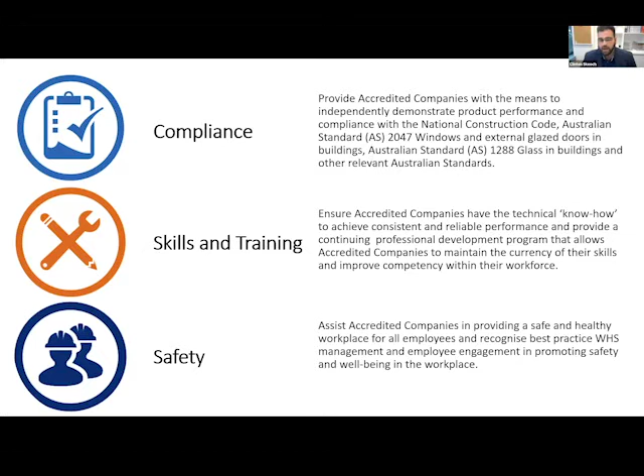To give you an example, the checklist or the assessment is not overly concerning. Many people hear the idea of an audit and get daunted or overwhelmed by what that may be, thinking the tax man's about to turn up.

There's a team here to help you through that process and talk you through any questions you may have to facilitate this. Together, I think if we're able to demonstrate that as an industry, we're able to show that we not only have robust standards, but that each and every member is able to demonstrate compliance. It's a very powerful thing for us to move forward together.

At the end of it, once you've completed that process, the association will issue you with a compliance certificate—so an accredited compliance certificate, safety pillar, or skills and training program.

Sorry, I thought there were some questions for me, but they seem to be technical questions in relation to the audio.

We've got the safety accreditation and also the skills and training. It's our hope that those three pillars will work together in partnership with each other to demonstrate to your consumers, to your customers, that your company stands for something, that you're standing shoulder to shoulder with compliant, accredited companies and being able to demonstrate best practice in our field.

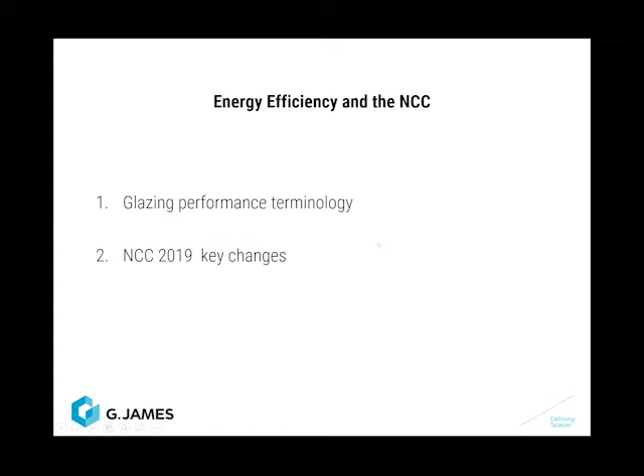We'll go through a couple of the key changes with regard to NCC 2019 for both Volume 1 and Volume 2. With regards to AFRC, or WERS data as it's more often termed, AFRC is referenced in both of the NCC versions through the guides and through the attachment notes.

There are a few things with window data that are important. First of all, they are done under specific sizes so that there's always an apples to apples comparison between two window products. So window A as a sliding window and window B as a sliding window are assessed under the same methodology and the same size. There are some quite strict rules in the background about how those values, with regards to U value and solar heat gain coefficient, are generated. They exist so that it doesn't matter who performs the assessment, the answer should be the same.

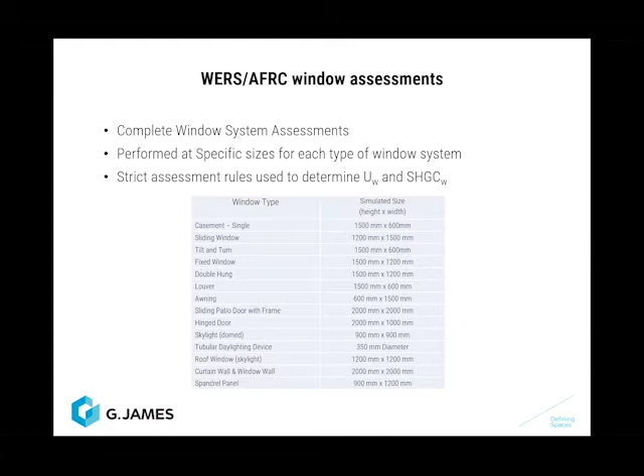With regard to solar heat gain coefficient, I don't know how many of you would have seen the SHGCw and U value, Uw terms. They are specific with regards to the whole of window, so they are essentially just the solar heat gain as an entire entity. One of the things I am going to touch on is thermal bridging, which is a bit of a buzzword at the moment, and it's one of the things the NCC has placed a lot of focus on, both with regard to Volume 1 and with regard to the changes coming through for 2022 in residential.

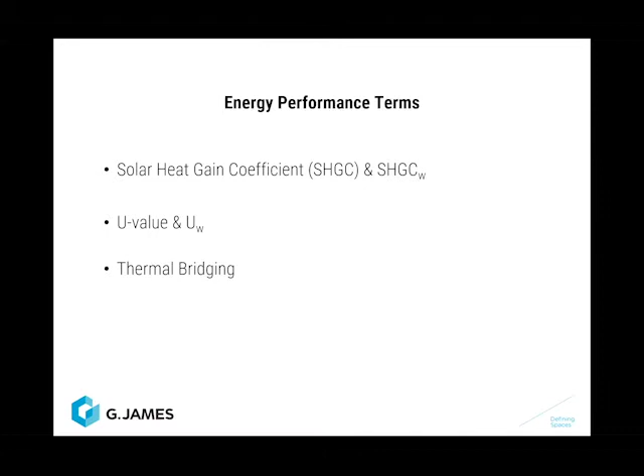Solar heat gain for a window system is an assessment of how much solar radiation is coming through that window. It includes both that which is directly transmitted and that which is re-radiated. It also includes the energy absorbed by the frame itself and re-radiated to the interior. There are some fairly aggressive environmental conditions both of these are done under. Solar heat gain is done with a warm external air temperature of 32 degrees and a typical air conditioning load on the internal at 24 degrees. Then there is a daylight amount that strikes that window, and it's calculated from those values.

U value with regard to window is a measure of the non-solar loss or gain through a window system. It's really analogous to R value, except it's essentially thermal conductance as opposed to an insulation value, so the two of them are usually a reciprocal of each other. There is no solar radiation in the calculation for U value. U value in Australia is calculated with regards to the NFRC or ASHRAE conditions, and they are extremely aggressive - calculated with a minus 18 degrees Celsius external temperature and a 21 degree internal control temperature, with a reasonable wind speed on the outside. As you can imagine, that is a very large driving force.

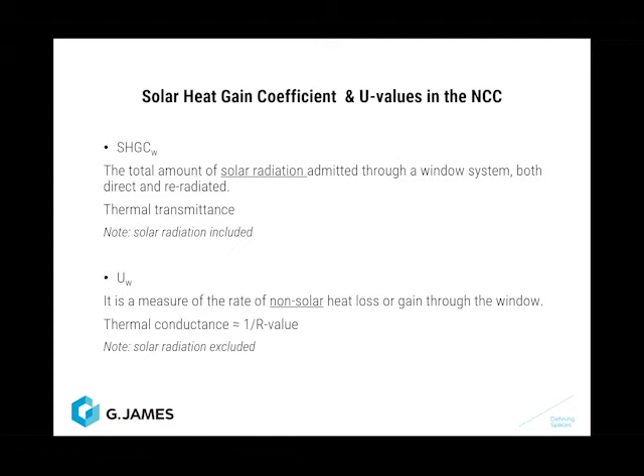Thermal bridging is probably going to be the most important part of what I touch on today. There is a formal requirement in NCC 2019 Volume 1 that thermal bridging must be included in glazing performance. Thermal bridging is a term analogous to a thermal short circuit. With regard to window systems, it means that all the elements involved in the fitment of it must be included - so if that includes subframing, angle glazing - if you are not taking into account the performance of those elements, you are not demonstrating compliance to NCC Volume 1, 2019 for any jobs that might have been done under those DAs.

With regard to NCC Volume 2, it is still business as usual, so the standard WERS values, most of which don't contain any subframing data or fitment elements which are variable, can be used and should be used. You might find with regard to multi-residential that there will be some requirement from some consultants to include the use of subframing. And as with all of those things, it's always up to the consultant what gets done.

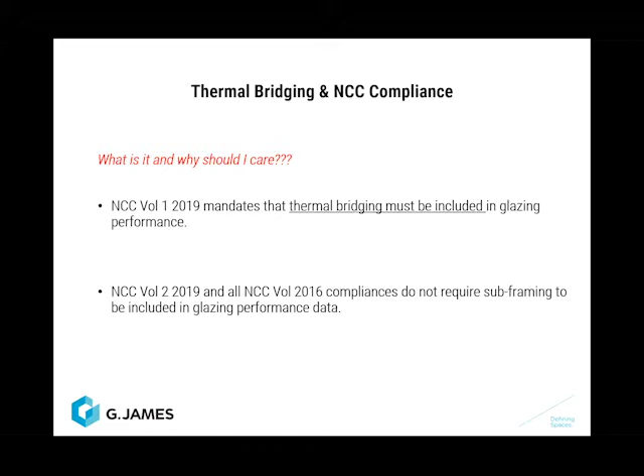So with regards to NCC as a whole, one of the things they tried to do is change the way in which it was being assessed. It's no longer glazing and climate specific design trying to generate the best outcome. What they have said is that the performance of the structure itself has to be optimised to lower its CO2 generation during its operation. There have been some new additions.

First and foremost, there has been a very large increase in the requirements, so the deemed to satisfy performance requirements have been made extremely strict. But they have also created alternate compliance routes: JV1, which is a NABERS assessment, JV2, which is a Green Star, both of which are as-built not as-occupied, and JV3 has been tightened up a great deal so that a lot of the loopholes that exist have been closed.

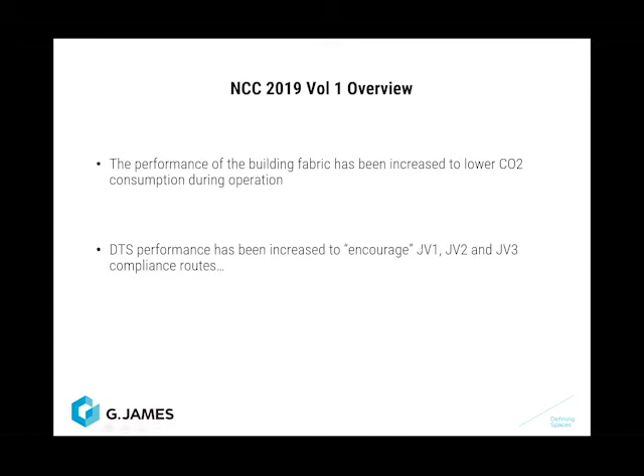For instance, one loophole that used to exist is that if you were using gas to generate power usage for a building versus standard electrical power, you could generate a different outcome. People would do the JV3 reference building using one of those energy forms, then change, and suddenly it didn't matter what they did, they had compliance. That's part of the real reason the drive towards CO2 consumption has been done, so those two energy forms and their CO2 contribution have been aligned correctly.

So this is just a summary page of what the major changes are. You'll notice that thermal bridging is at the top - this is obviously the one change for the glazing industry which should be addressed first and foremost. The new compliance methods are just Green Star and NABERS. For JV3, if you go through section J, the requirements are now extremely detailed.

There are occupation and occupied zone usages, times, heat loads being generated by individuals - all of those sorts of things have been very aggressively detailed, and that's to make sure a lot of the loopholes are being closed.

Significantly, with regards to the glazing industry, has been the creation of overnight operation buildings - that being class 3, hostels, boarding houses - and a lot of the medical and ward areas for medical buildings now have extremely stringent energy requirements.

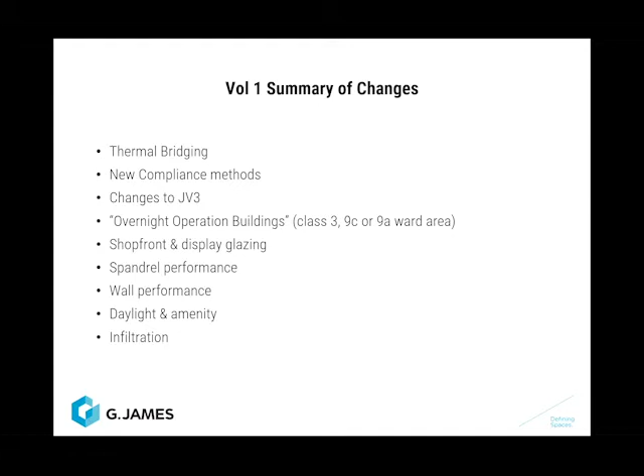Infiltration - this is a workmanship clause which has been placed into the code. What it's saying is that for the defined areas they have done, they are actually generating the quality of workmanship that a windows system should have. That's one to be aware of, and a testing methodology for compliance exists for that.

So as I went through, wall is now the term that determines the performance of the building envelope. It guarantees wall, glazing, spandrels, brickwork - it doesn't matter, they all have a requirement as a wall. For the glazing industry, that wall performance has actually been placed in as a U-value performance, which is quite advantageous because it means the methodologies that exist within WERS and within the AFRC can still be used to generate outcomes.

One of the terms you might see used is window-to-wall ratio, which is really just the percentage of glass that exists in an elevation or within a facade.

One of the things that wall doesn't include is vents and grills and non-glazed openings into the structure. It's just because mainly they don't know how to deal with it yet.

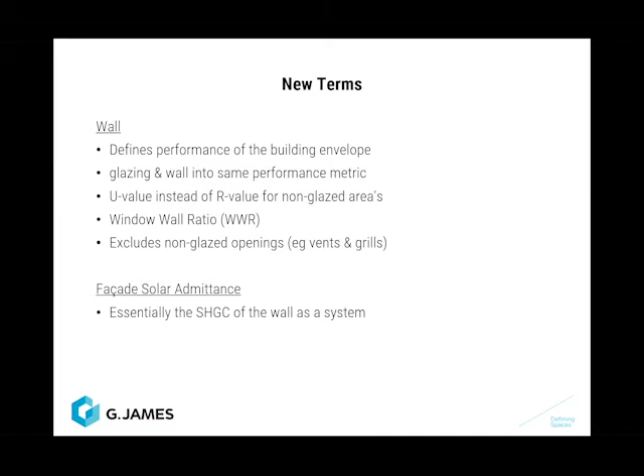The other term you will see written is facade solar admittance. This is merely a term describing the solar heat gain performance of the entire wall. It's analogous to the same, and because the solar heat gain of a non-transparent element is 0, you can always calculate the wall's performance by multiplying the glazing solar heat gain performance by the window wall ratio. So whether that's 0.6 or 0.7, you can calculate an outcome quite easily.

Changes to JV3 - this is both good for the industry and bad. One of the things they have done is reduce the ability to trade off facade performance for services. That doesn't mean you can't trade off the performance of the wall itself - you can take some of the wall performance from a western wall and put it on a northern wall if you want. But it means the overall building fabric is a lot harder to trade off, and that means the performance of glazing will improve.

When a JV3 is being done, they've said no longer is it acceptable for any calculation method to be used. You now have to use one that is compliant and certified against ASHRAE 140, which merely demonstrates the reliability and quality of a calculation engine.

There is a human comfort level that now exists as mandated within JV3. It is the same one that exists within Green Star and NABERS. So those three compliance routes have been aligned.

There are very large sections in JV3 that determine all the variables that must be included in the simulation and comparison against the reference building. This is really just to reduce the gaming that was going on, and it also means Green Star and NABERS align with JV3. So it doesn't matter which compliance method is used, the same outcome should be obtained.

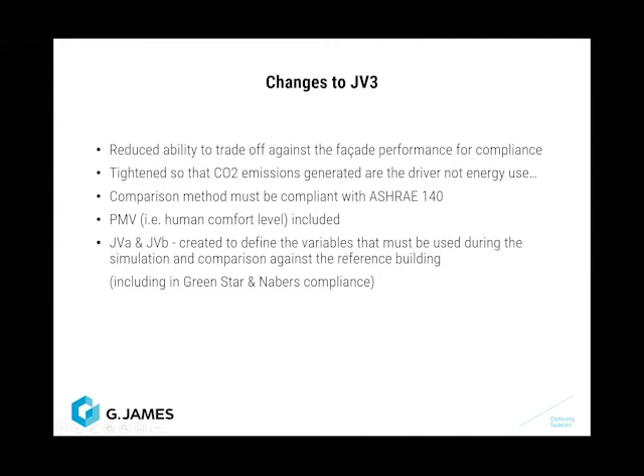So the DTS, or deemed-to-satisfy requirements, for most buildings or daytime operated buildings - you can see that the U value is required to be less than or equal to 2. That is quite stringent. It is not as generous as it has been previously.

And you will see the solar admittance factors, or the solar heat gain for the wall, are listed there. So obviously some of the warmer climates, you can see, are quite stringent.

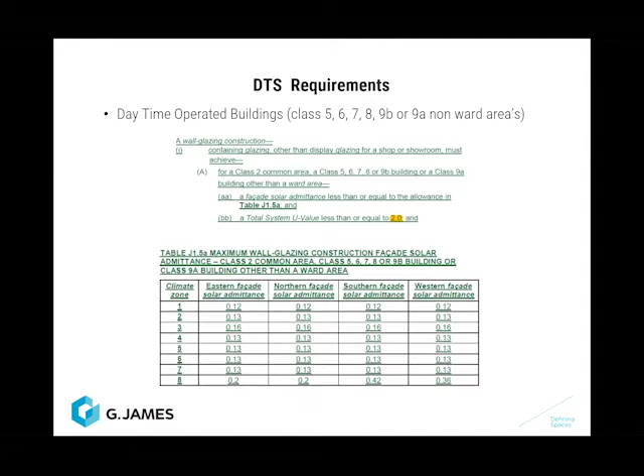I'll flick on to the next slide to give you an idea of what those numbers actually mean. So as you can see, for a solar admittance of 0.13, if you're using a high performance glazing system - and I've assumed in this case something like a tinted double stack low-E IGU - which is going to have a solar heat gain performance in the realms of low 0.2s. 0.23 is pretty average.

So you can see that really generates just under a 60% maximum performance of the wall before a Green Star, NABERS or JV3 compliance route would need to be done, which obviously allows a lot more trade-off. That's one of the things that underlies the code now - they're really trying to push people in those directions rather than having a simple deemed-to-satisfy.

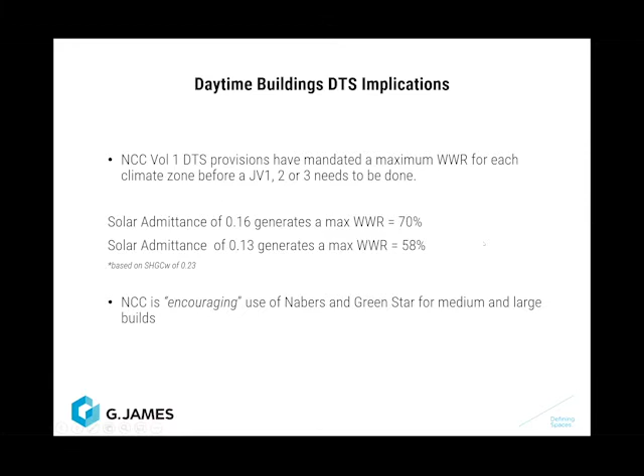Okay, overnight buildings. Now this is something which is important, and they are extremely stringent. There is no way of working around that. These values are extremely low.

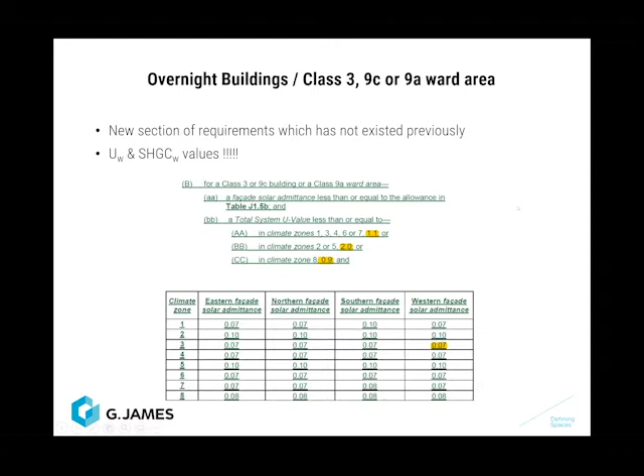The only building I'm aware of that meets the deemed-to-satisfy for a U value of 1.1 and that solar admittance is actually the Armidale-based hospital. To give you an idea, that has a window to wall ratio of about 11%, and uses some extreme performance materials. So really, I haven't seen any compliant jobs coming through yet for these types of buildings, but they will be extremely difficult to comply with. I suspect there might be some magic from the consultants in the background.

To put some of those numbers into perspective, I've once again assumed a high performance IGU. So based upon the solar heat gain requirements, you could have a 30% window to wall ratio, but based upon a standard - and I've used a floor to ceiling assumption here for what an aluminium glazed window system would be, which is a U value for the whole system of about 3 with that type of glass in it - you would be allowed to have only 3.6% glazing within the entire wall. So as you can understand, that is very difficult.

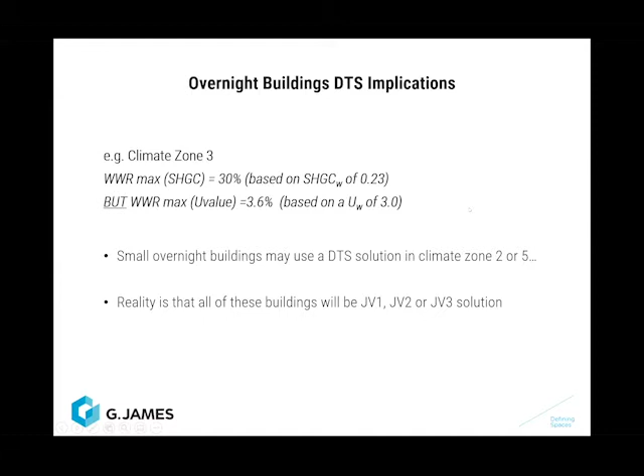So even a hyper performance, thermally broken system would still be less than 10%, or just on 10%, of what you could possibly do as a deemed-to-satisfy. Really, they're just forcing everyone's hand into having to do high-level analysis to move the design around to suit its climate, conditions and use. However, I do believe they are far too strict, and that one day there will be a large pushback against U-value in some of these climates and areas.

So I touched upon shop front and display glazing and its implications before. Basically it means a clear IGU and even a moderate standard aluminium frame system satisfies these installations, which is a great thing, because there's no longer installations like some of the car dealerships where they're having heavily tinted high performance glass products in, which was changing the appearance of the vehicles. I actually think this is one of the things the NCC did a great job of.

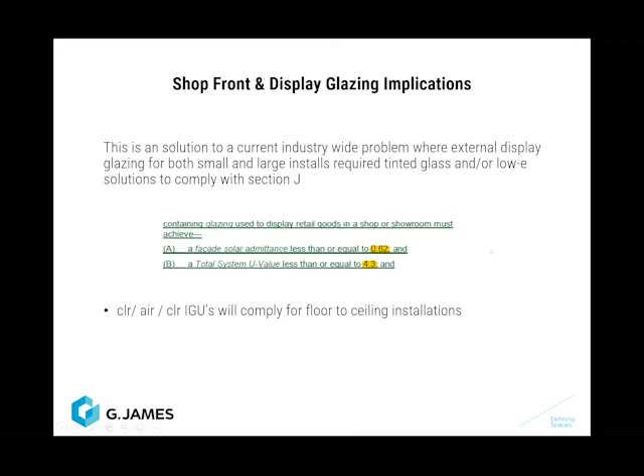These are treated in two forms in the NCC. There are deemed-to-satisfy types, with performances given for standard aluminium and thermally broken glazing systems. But the code allows you to do an AFRC or WERS simulation on those, and you will get a significantly better outcome, both for U-value, if you do the full simulation. The ability for those ratings to be done exists currently, and it's something I'm certainly making sure you're all aware of.

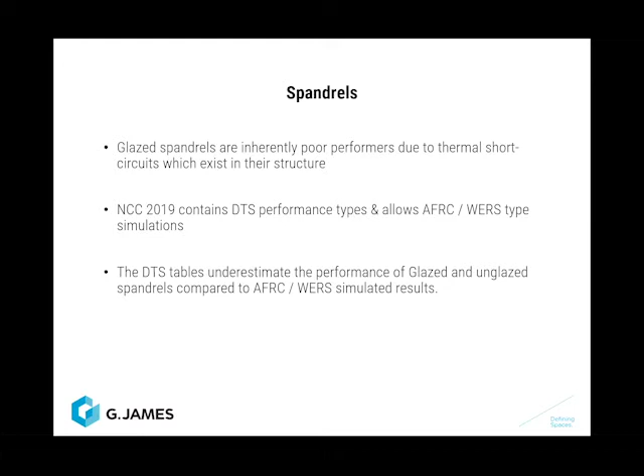Infiltration — we touched on this before. Essentially the ability exists for someone to go back and do a blower door assessment on an installed glazing system and show that it didn't meet its legislated requirements. That's something I think we all need to be aware of and mindful of, that it exists now. It's not overly stringent, but there is a workmanship clause for glass and glazing that exists.

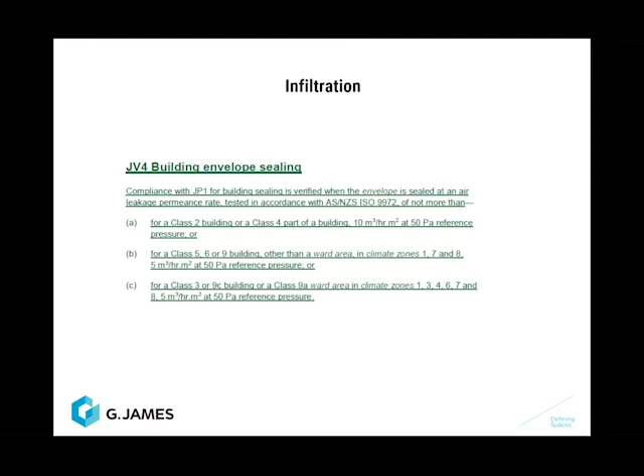Okay, so quickly we'll touch on Volume 2, which is the residential section of the code. Now, Volume 2 hasn't had a change in stringency, but it's definitely going to be harder to comply with. No doubt some of you might have started to see the changes in residential glass types and residential glass performances, which are starting to filter through.

The reason for that is what used to happen is if someone was doing a NatHERS assessment — Accurate, BERS, First Rate, any of those programs for compliance — if it was in a cooling market, they used to make sure the cooling performance of the structure met the requirements. What you have to do now is demonstrate compliance for both its heating and cooling performance. So in mixed climates in particular that will generate some differences in the glass, and much higher performing glass you will start to see being requested.

So the verification method for the reference building, which has been at times abused in certain markets — not in this market, but in some of the other states — it no longer allows NatHERS software programs to do the reference building comparison.

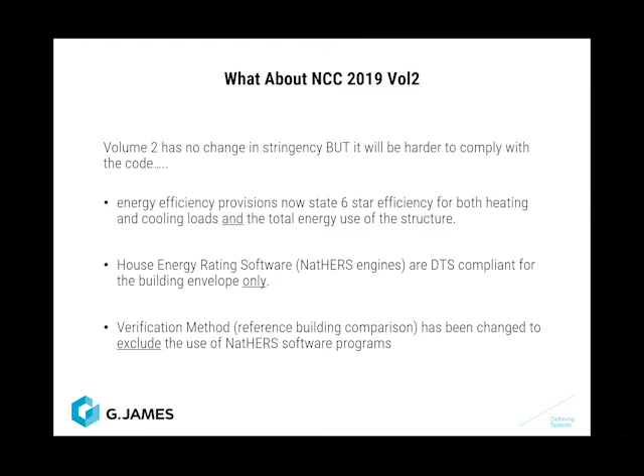Now, the reason for that is multi-level NatHERS programs always used to assume everything was a slab on ground for its analysis. So when it was an elevated level, the performance of the calculation engine wasn't optimized. That's something they're working on at the moment and will probably be fixed up in time for 22. But the outcome of that, which we'll all see for the next few years, is that glazing performance is going to increase — in hot markets, cold markets, and particularly mixed markets.

Okay, so with regards to the changes coming through, there are no changes expected for glazing until 2022. I think we're all aware that residential and multi-high-rise is going to have a sizable stringency change in 2022, and I believe there will be some other requirement changes as well starting to filter through. But I don't believe that is going to be in our worst interest — I believe better performance glazing is in everyone's best interest.

And that's all I have. Probably before I finish up, one of the things I will say for the NCC 2022 residential review is that I would expect everyone to see the influence of those changes being larger on glazing than we would have experienced previously. The reason for that is a lot of the low-hanging fruit, the easy things to improve in residential building design, have already been done. So I think this time around we will all see a larger increase.

Are there any questions? There was just one there, Michael, about what does PMV stand for?

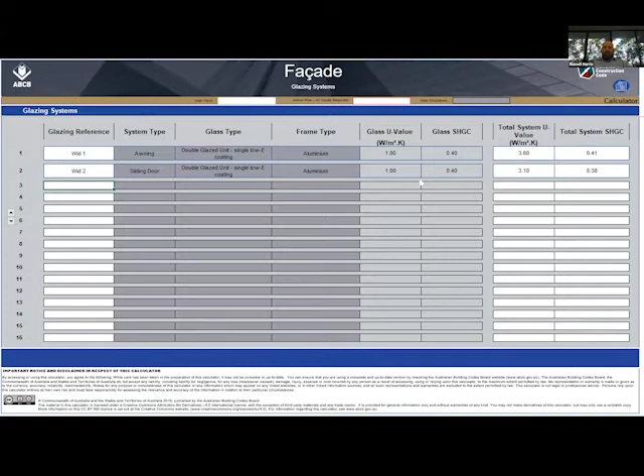This is what the glazing system looks like. It gives you the opportunity to enter in various attributes about the window or the glazing system, the whole of window U value and solar heat gain. Then you go on and put in the wall details, shown here. I won't go into this too much detail, I don't expect many people will be dabbling in this space too much, but it's possible depending on what your business model is and what sort of engagement you have with your supply partners. This is what it looks like in terms of entering in the wall data, and you get a green or a red result to tell you whether you're compliant or not. There's also elements of shading in here.

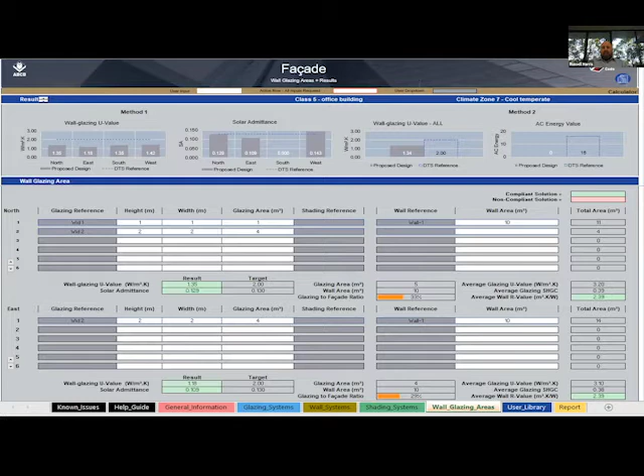The outcome is a report, which is effectively a pass or fail, not too different to the old glazing calculator. The main difference being that it takes into account the 3 elements of the wall U value, the glazing U value and solar heat gain, as well as the shading to calculate the solar admittance.

There's a really good publication from the ABCB on energy efficiency in volume 1. Allow some time to read it. It's a couple hundred pages and it's pretty hard going, but there are some really good worked examples in there. If you want to understand the science behind it, grab a calculator, a pen and paper, and you can do it yourself. It actually explains how these calculations are derived, so that's a valuable exercise if you really want to understand it. And this publication is available on the ABCB website for free.

I want to move on to the other changes in the NCC 2019, and they're fundamentally around acceptable construction practices. ACPs are effectively a DTS solution, so our recipe for compliance. I'll just flick through those.

Fundamentally, the most relevant part for us is window installation. The ABCB invested a lot of time into expanding the ACPs, particularly in volume 2, and we were engaged with the ACP working group under the ABCB committees. What we were fundamentally trying to address is this word 'adequately'.

This is the previous provision, from the 2016 construction code. There was one sentence in there that said all openings must be adequately flashed. Now it depends on what state you're in.

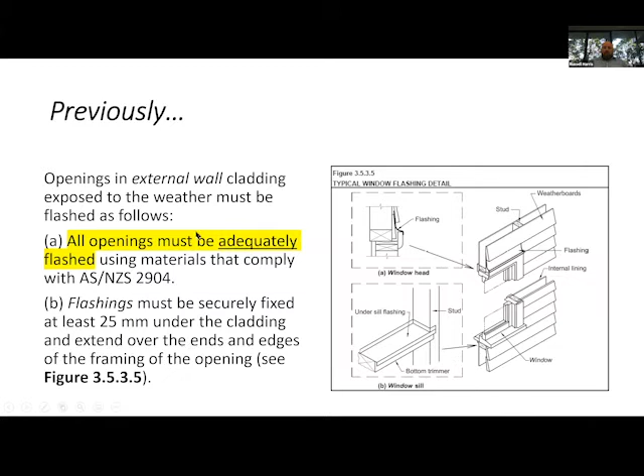And how robust you wanted to build a building. That word 'adequately' was certainly, in our experience, interpreted very differently from one region to the next. Queensland's got a pretty good track record of doing this well, mostly because of the cyclonic influence and all the rest of it. But that certainly wasn't the case nationally, and a lot of work has gone into beefing this up a little bit. So I'll just go through what the new provisions cover.

They're broken down into two types, one for masonry veneer and the other for clad construction. Fundamentally, it now mandates head flashing and sill flashing for masonry veneer construction. It outlines various provisions like the amount of overlap, the positioning, the drainage, and what's required in the installation of flashing. These images are not from the NCC, they're from our guide, but they are consistent and comply with the outcomes of the NCC.

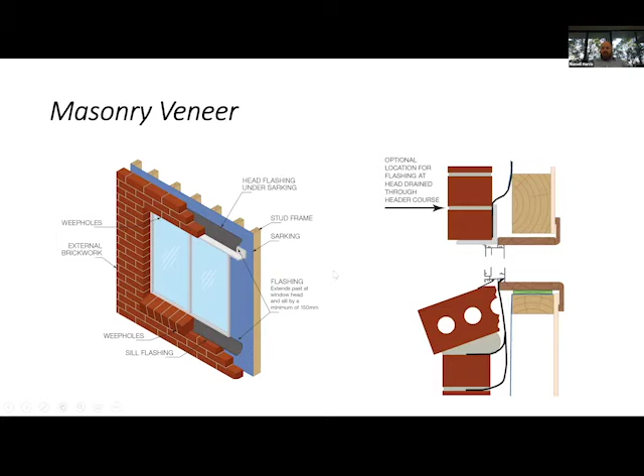So that's a fairly substantial change for some. For others, it'll be business as usual. In the lightweight construction market, it's appropriate to add jamb flashing as well, so effectively the same provisions, though some of the measurements differ slightly.

In masonry veneer, it's 150 mil flashing. In timber and composite cladding, it's 110. I don't pretend to understand why the difference, but that's where we landed through the consensus-based approach that is the ABCB mandate. It's effectively the same: the head flashing and sill flashing must drain to the outside, and jamb flashing is added in the lightweight construction sector.

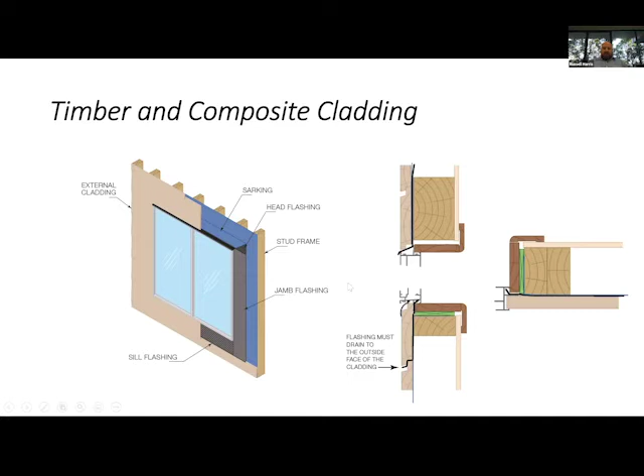I think it's important to share with you the work we did a few years ago developing the videos. If anyone's got questions, particularly in the residential space for builders who aren't quite sure what these new provisions entail, all these new provisions are consistent with our recommendations from several years ago. So the videos on our YouTube website are compliant, and they're freely available for you to share with your clients and builders to help them through the installation process.

As I said, it's on our YouTube page. It's probably worth mentioning there's a lot of other videos in there that we've published, some on energy, and I think some safety videos added recently. It's worth going in and having a look—you can go onto our website and follow the links, and it'll take you through to our YouTube channel. It's worth a couple of minutes just to check out what's on there.

I think I've just covered that, sorry. As a final note, we have published a guide for residential window installation, which covers all of these requirements and goes a little bit further. It also covers direct fixed masonry and solid masonry.

These are, I guess, still recommendations. There's no mandatory provisions in the NCC for those construction types, but there's certainly some strong guidance provided by industry and outlined in this guide. It also covers the subtle differences between window types, like windows and doors having different sill flashing details—they're very different, so it explains the differences there, and also shows the differences for UPVC and timber as different framing types.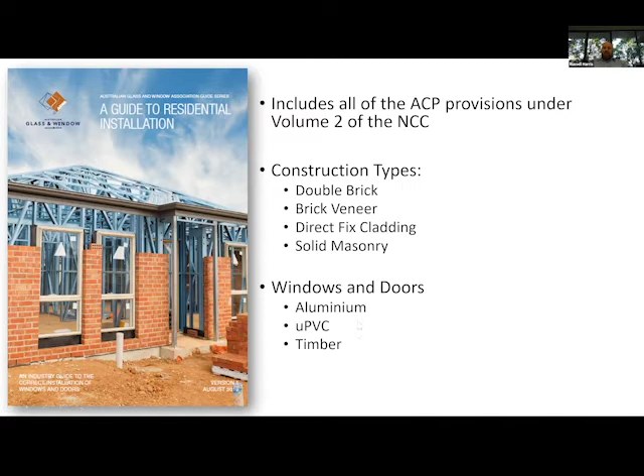You're probably mostly all aware that AS 3959 was revised in 2018, so it's a little while ago now. In line with that, we've published a new and updated guide.

Fundamentally, there haven't been a great deal of changes to the requirements. Most of the revision was focused on other areas of glazing. Glazing was considered to be quite a mature building component in terms of this standard, so there wasn't a lot of change. It was mostly based on correcting some anomalies or errors in the provisions.

But there are a couple of additions, particularly around the fixing of screens, requirements for metal fixings, and clarification around hardware requirements - when metallic hardware is required and when it's not - and some provisions for shielding things like sliding door rollers, which are predominantly non-metal. There was some ambiguity as to what complies and what doesn't in that space, so those elements have been clarified in the new standard.

Our guide has been developed to really break that down into simple, common language. Standards are often hard to read because of the terminology used. We've written our guide to be plain language, easy to read, understandable by anyone. You don't need a doctorate in engineering to follow the provisions.

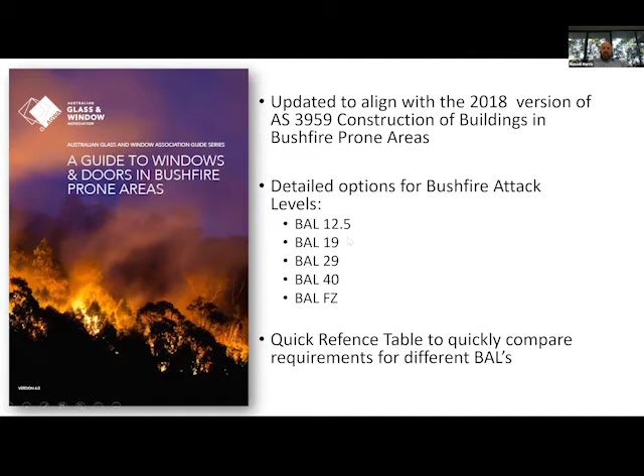That's on our website and free to download for members. A heap of other information - we're constantly working on publications and information for you.

We get a lot of questions. We love questions. We encourage you to give us a call anytime if you've got any questions, because that really gives us a good indication of where we need to direct our focus. If we see questions repeating, or emerging issues coming from nationally or state-based sources, we can pivot and adjust and develop. Where we see these trends emerging, we put out publications on a regular basis.

We tend to average 4 to 6 a year, so quite busy in the background. You can see the one I've got here on the left is the window flashing requirements for NCC 2019. There's a very succinct 2-page fact sheet that you can hand out to your builders if they're not sure what the changes involve.

That's free to download. We've got a guide on condensation management, possibly not a critical issue in Queensland, but certainly in other states it's an ongoing issue that we see coming up every winter.

We also have a fact sheet on Section J, which explains a lot of what Michael was talking about earlier, and outlines how it all works and what the key issues are. That's worth a read - it's a longer key message, probably one of our largest ones.

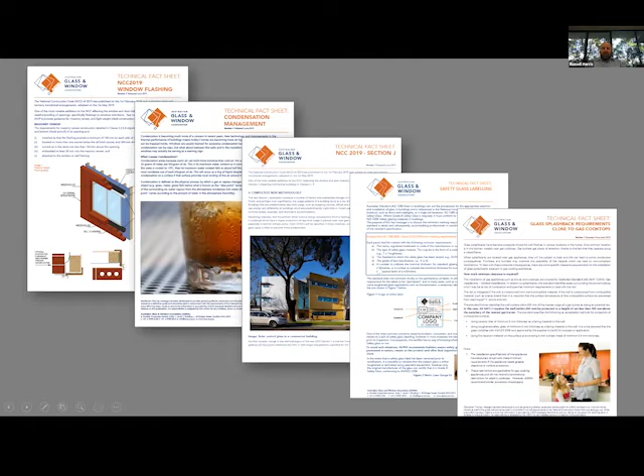So that's worth a read also. Jump on our website under the members section in the resources. There's a key messages page and a table which lists the 40 or 50 key messages we've got currently out there, and we're constantly adding to it.

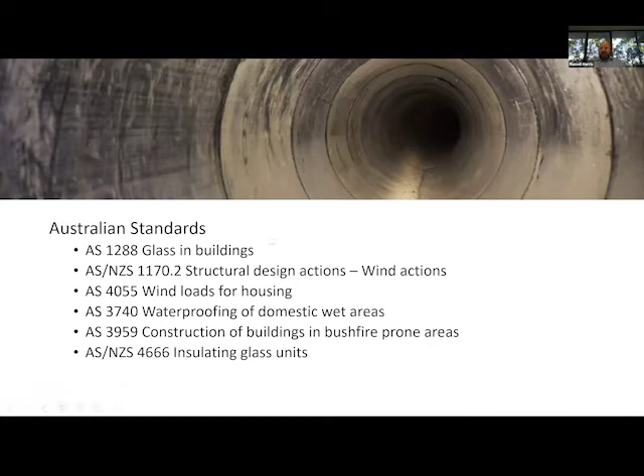That's probably the main issues that are current, but there's a fair bit coming through the pipeline which I wanted to share with you that'll come into effect over the next 12 to 24 months.

Probably first up, and most relevant to us, is a revision of 1288. That standard was last published in 2006, so it's well past its 10-year revision period, and consequently it's now being revised. The current project is limited in scope to only sections 6 and 7, covering sloped overhead glazing and balustrades. The project scope in section 6 is to increase the tables and information, the calculation methods, to include three-sided support and cantilevered overhead glazing.

And in section 7, balustrades was only added to the standard in 2006, so it wasn't in there previous to that.

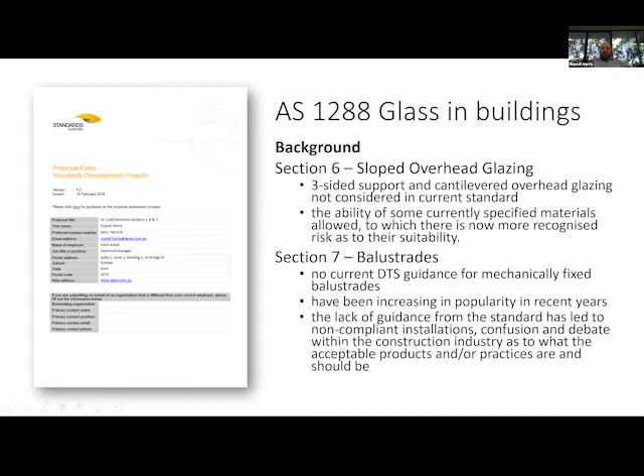So it's time that we clarified some of the outcomes. It's been a bit of a rocky road for the last 14 years with that part of the standard, and it is commonly misinterpreted. There's a lot of work being done to clarify what the requirements are. We're all familiar with the interlinking handrail clause, or most of us who work in that space have products in that space.

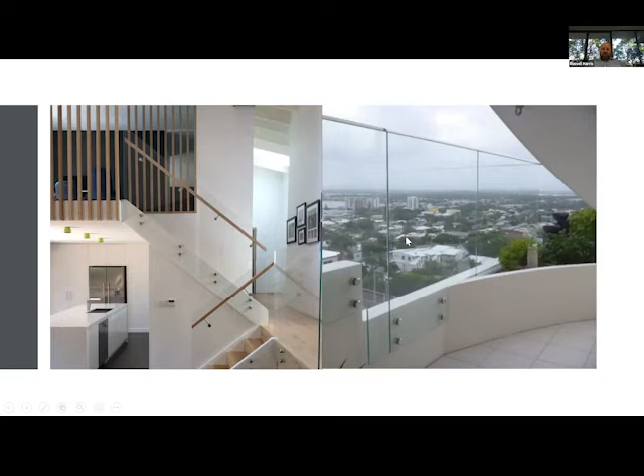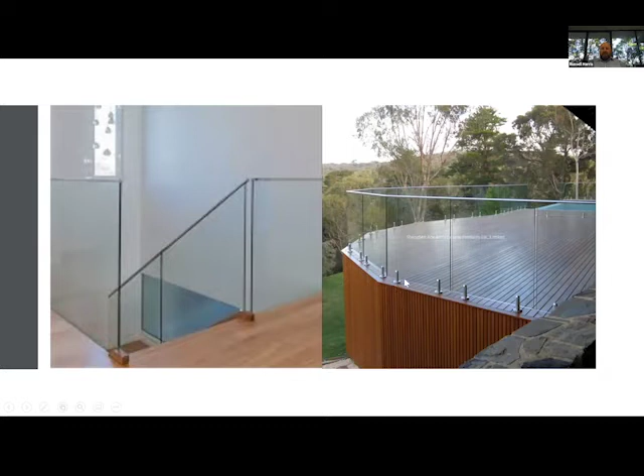There's this ambiguous clause around interlinking handrail, and I'm throwing up a few photos of balustrades that are actually non-compliant with the standard. That's because the standard doesn't provide solutions for things like spigots and standouts. They're just not covered in the current standard. So a lot of these things are getting through and being certified as compliant with 1288 through misinformation and misinterpretation of the provisions.

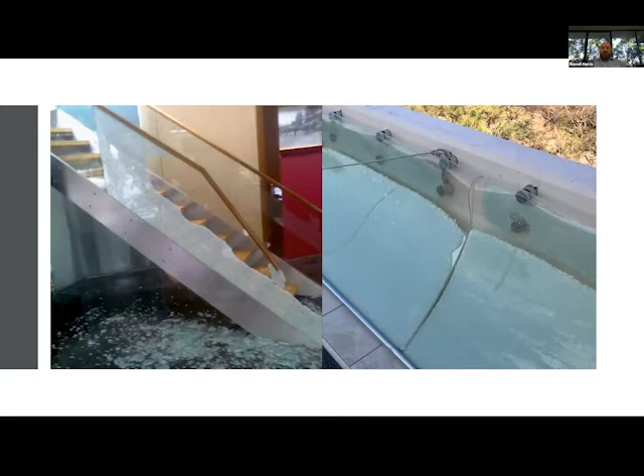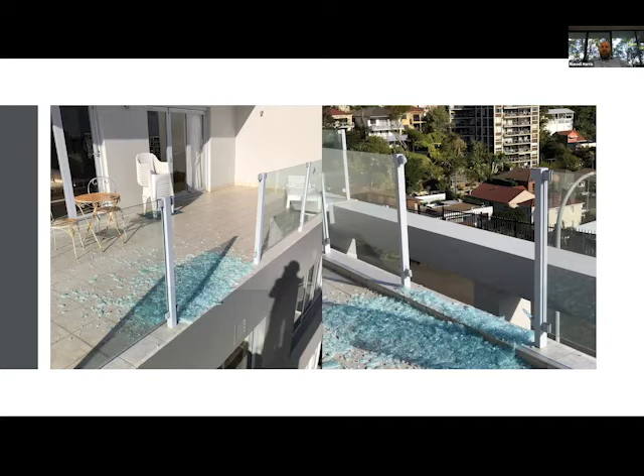So this is why we see this. We get reports from industry. We hear about it in the newspaper, on the news at night, when these things fail. It always grabs attention, and there's an opportunity for us there to improve the outcomes.

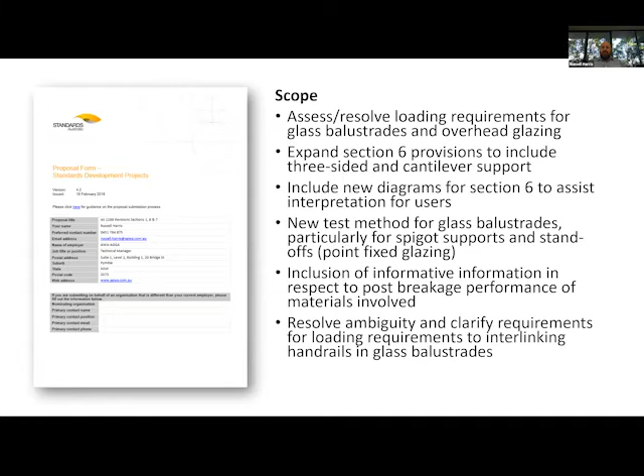So, as I said, section 6, we're looking at improving information. There's a lot of work being done in that space. The technical committees and working groups have really moved a mountain to get this across the line. We're in the later stages of drafting. I think formally the drafting process closes on Monday, and then we'll go into editing, and then public comment in around 6 to 8 weeks' time.

So there's a lot of work gone into it. For section 6, part of the project is we used to have tables which only gave us aspect ratios, and they were difficult to read and weren't granular. There wasn't a lot of information there. They were difficult to use.

These tables are a much better way of calculating what the requirements are, and they're analogous to, very similar to, the wind loading charts in section 4, I think, where you've got the height and width, or the length and width of the glass, and then you draw a line, and it clearly communicates what the glass thickness is required. So this is a draft table, an early iteration of the tables we've been developing, but that's fundamentally the objective—to give us more information, easier to understand information.

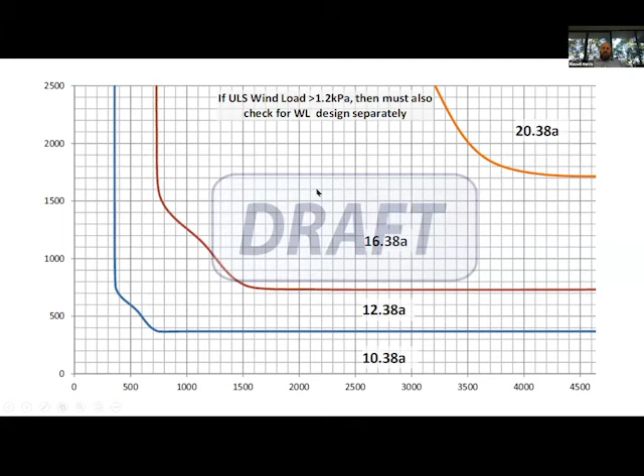And we've also added thicker glass types. The old tables were limited to 12.38 and thinner. We've added these larger, thicker glass types in the DTS provisions, so much more fit for purpose solutions. We've also added a method of test. For those balustrade configurations that are outside the scope of the current standard, we've added a normative appendix, which is a method of test that can be used to evaluate the compliance of a system and demonstrate that it meets the requirements of the standard and the code.

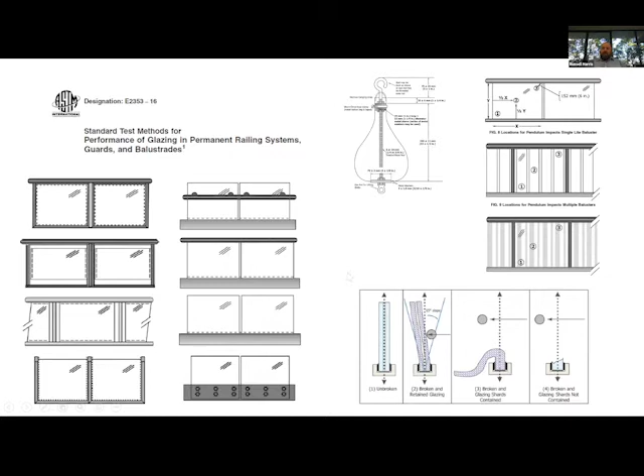Additionally, we've got work going on with the wind loading standards. This is just part of the normal review process. Every 10 years, the standards get revised. 1170 is, I think, public comment is closed on 1170 now. And fundamentally, they're just updating the standard based on more modern information.

If you think back 20 years, we used to have manually measured weather stations at post offices or lighthouses, things like that, and they were manually checked every day, and twice a day that data was sent off to the Bureau of Meteorology. Now we have thousands of automated systems giving hourly data, and all of that information has given us a better view of the climate and wind conditions across the country.

So all that information has led to a bit of a remapping. Anyone familiar with it, there's a map in the standard which allocates the regions. The boundaries between those regions have been adjusted slightly, and some new intermediate regions have been introduced. There's also been development done on the phenomena of downbursts, or very high intensity storms that don't last very long—those phenomena weren't covered in the previous standard very well.

So a fair bit of development has gone on there, which all leads to just a slight increase in stringency. I don't think there's any real significant change, but obviously an improved methodology leads to slightly different outcomes in some circumstances. And because 1170 part 2 has changed, that means 4055, the wind load for housing standard, also needs to be updated. So there's a current project to update that standard as well, and there's quite a lot happening there.

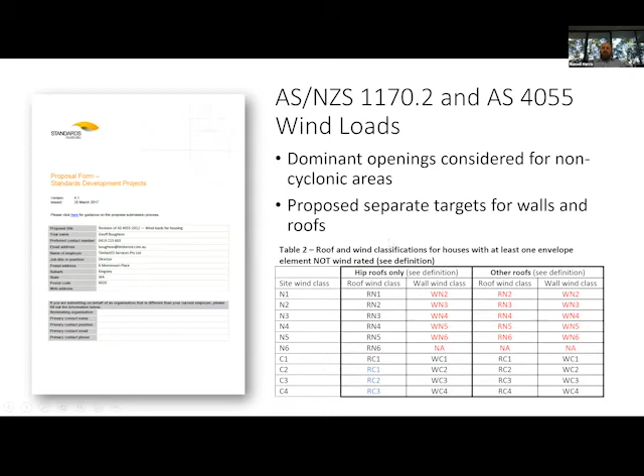I won't go into too much detail now because it's still in the drafting process, but we'll provide more information on what the outcomes are in due course.

There's also a current project to revise AS 3740, the waterproofing standard. This is a great opportunity we've grabbed, because the provisions for shower screens in this standard were ambiguous and non-specific, and we've added a lot of content to provide further guidance to building designers and installers about waterproofing requirements, particularly around the interface between the waterproofing membrane, water stop angles, and shower screens themselves. A lot of work has been done there, and that standard is expected to go to public comment shortly, and we'll share more detail as that comes to hand.

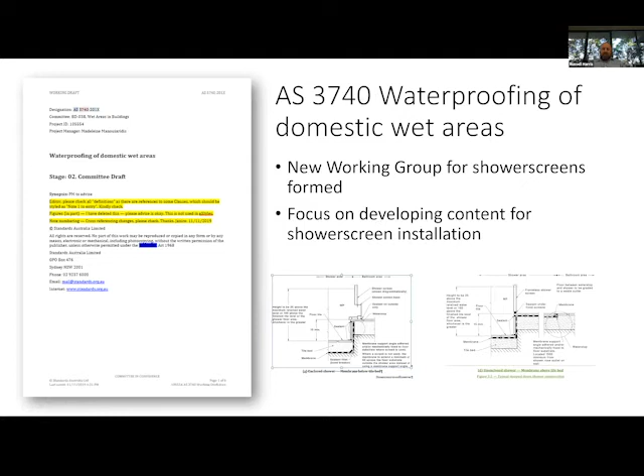Obviously we reflect on the Christmas period before. It seems so long ago with COVID, but we had the worst bushfire season in our history only six months ago. There are multiple investigations and commissions ongoing, and out of that there's new intelligence and better understanding of building performance in bushfires, which will inevitably flow on to the bushfire standard. At this stage there's no active project to revise the standard itself, given it was only revised in 2018. But we've got early feedback from those investigations that, as far as glazing is concerned, buildings performed quite well.

So what we're seeing so far is we're not expecting any really massive changes to the glazing provisions in 3959. But we are seeing a renewed drive by government to push for retrofit solutions and adapting existing building stock. There are opportunities there, and we're participating in committees developing that guidance material and publications to inform industry and consumers on what options are available.

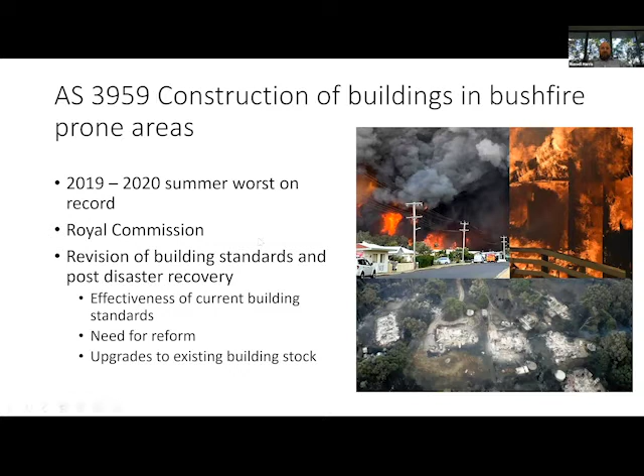As you can see, there's a lot of work going on. We've got 4666. Now that's not a current project, but it's worth mentioning it was last published in 2012, so it's due for a revision soon. But there was an amendment in 2018 which addressed some of the barriers to compliance faced by industry.

I guess the crux of this message is that 1288 requires IGUs used in windows and buildings to comply with 4666, and there are some testing requirements attached to that. There hasn't been great uptake from industry historically in the last 10 years, but there has been renewed interest, primarily driven by increases in stringency around energy efficiency and the increase in usage of IGUs. Together with IGWA and our association partners, we've been working hard on raising awareness of 4666, and we've added it to our accreditation program. So as part of the window audit now, we're looking for verification that the IGUs used in windows are compliant with 4666 and have been tested to 4666.

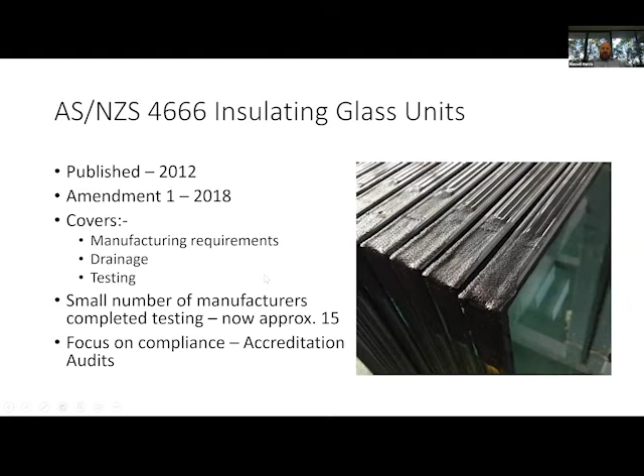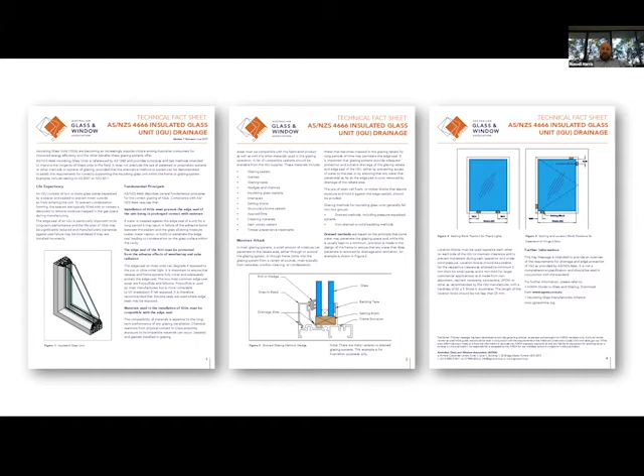So yeah, it's something to keep on your radar. We are seeing more IGUs being manufactured than ever before, so the longevity and durability of those units is important for our industry. We have a key message outlining the installation aspects of IGUs. We're currently working on a supplementary fact sheet to go with this one, which talks about the testing requirements and compliance aspects of IGUs, and that should be out shortly, I'd suggest in the next couple of months. So yep, that's another one on the radar.

Now, coming back full circle to the energy topic, I know it's all our favourite one. NCC 2022 is the next iteration. Michael spoke about what we're expecting to see. We are expecting increased stringency in volume 2, and under the trajectory, another increase in commercial stringency in 2025. We've got staged increases slated for industry all the way out to 2030 under the COAG trajectory. So this is an ongoing issue, and it's the hot topic.

Commensurate with that target or trajectory, we've been working very hard to future-proof the needs of industry, to make sure the importance level of windows is recognised in the construction code, and that the solutions are appropriate and achievable. This slide shows a white paper we've developed where we're talking about not only improving the information through to the NatHERS system, but also working with Standards Australia to develop local standards, adopting ISO 15099 as a methodology which underpins what we do currently, but also supplementing that with local climate conditions, sizing and parameters for windows and their thermal performance assessments.

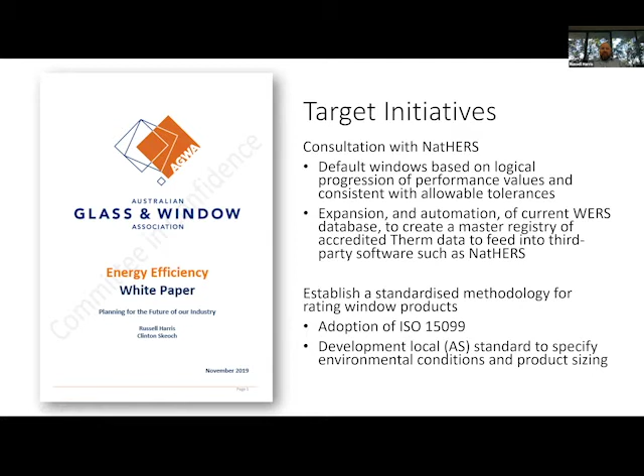And to have those standards referenced in the NCC. That's all about removing a lot of the ambiguity and the gaming that's available under the current provisions. And we're participating with, or working with the ABCB to deliver that.

Just to explain that and its importance, a U value is not a U value. It's not well understood, particularly by government, that if you measure a window under European values, you're going to get different results to that same window measured under Australian or NFRC conditions. They use different climate conditions, different window sizes, and they measure edge of glass value differently, and solar heat gain very differently.

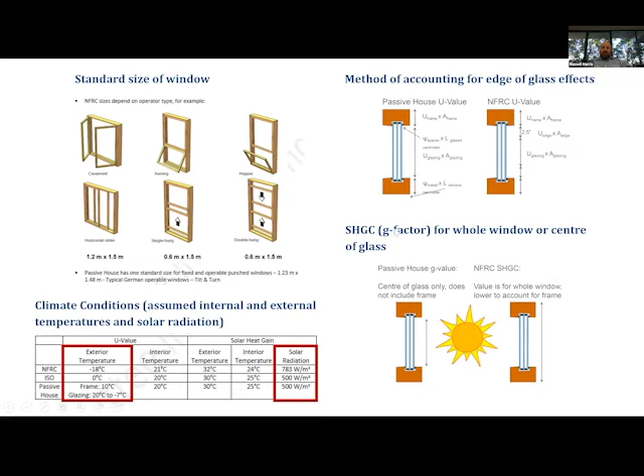So these are all the differences between the way windows can be modelled under the NCC at the moment, and that lack of standardisation is problematic for the future of our industry if we're going to maintain a level playing field. So that's an important body of work that we're working on.

And this is, I guess, what it looks like. This is the project proposal we've submitted to Standards Australia. We're working with them to adopt 15099 and to put in place - this is a gobbledygook formula - but it's an algebraic expression which allows us to scale up window performance to at-size ratings.

And also model performance with additional mullions, transoms, and substitute different glass types. So this type of methodology, introducing that to industry, I think will be a big value add. And this project hasn't been formally approved, but I think we're on the cusp of getting that committee constituted and underway.

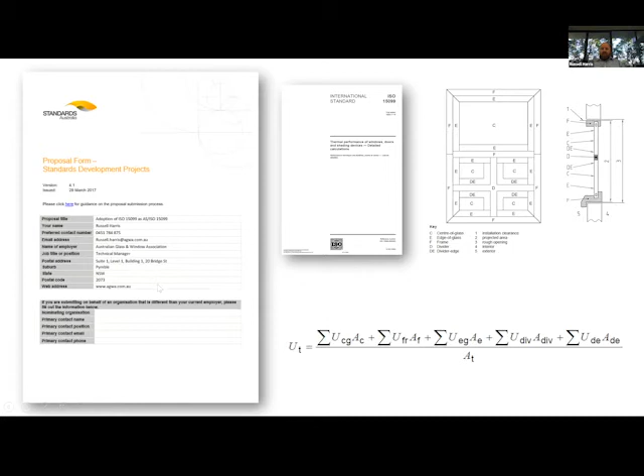In terms of regulation, this is a scoping study that was published beginning of this year. We provided feedback to the Building Code Board on the scope that they're proposing. There were multiple questions raised in the scoping study that we responded to, and following that, we were very happy to advise that we've established a seat on the residential working group.

It's something we haven't had before, and we now have a seat at the table, and we're represented in our own right with the ABCB, and that's really come off the back of a lot of advocacy in raising awareness and a recognition of the Building Code Board of just how much value glazing has in the thermal performance of buildings and its importance level.

So we're able to advocate with a much louder voice than we've perhaps had in the past, and we're looking forward to continuing that conversation on an ongoing basis, not just in 2022, but also out to 2025.

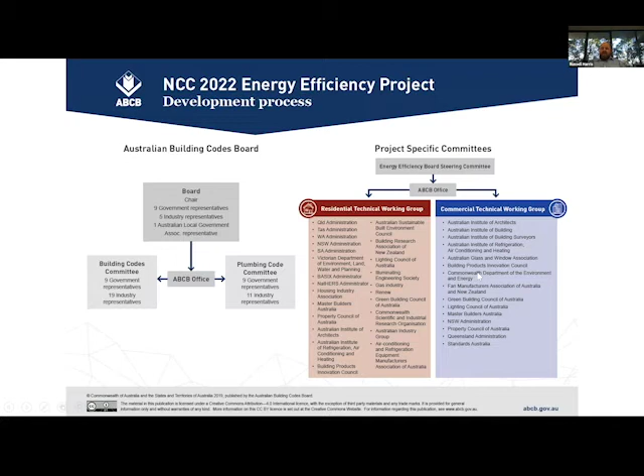As I said, we're on the residential working group, and we're also on the commercial technical working group, though we're not expecting to see any great increase in stringency in volume 1. We are on that committee, and we continue to monitor the drafting of those provisions for any adverse outcomes, and also take advantage of any opportunities that might present themselves.

So in terms of where we stand for 2022, we're here. We're actually probably a little bit further along. The drafting process will close in November, so we're a bit better than halfway through that process now.

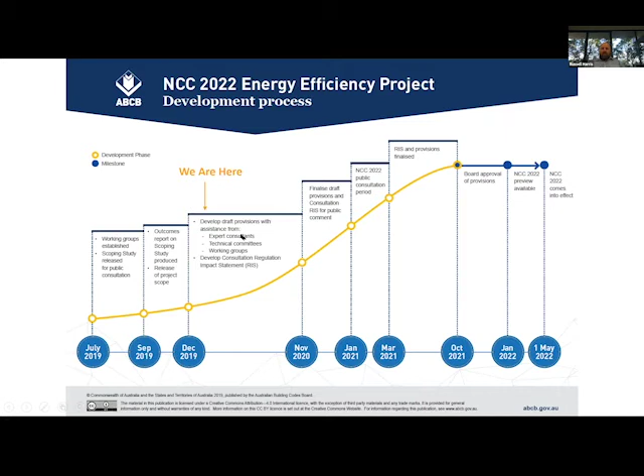We're dealing with multiple reports. We get some kind of report from a consultant on a near monthly basis. In fact, more weekly these days. And they tend to be anything from 30 to 300 pages long, detailing all of the what ifs - we could go this way, we could go that way, what are the best outcomes for industry.

And we've got a working group and a team of people, including Michael, who you heard from earlier, constantly - these are all over our radar. We're keeping up to date with the developments and making sure that industry's needs are represented and that industry has a voice in the development of these provisions for 2022.

To give you an idea of the kind of responses that we've had, we write papers, we write emails, lots and lots of back and forth talking about what's important and what government need to address in terms of the thermal performance and windows' role in better outcomes for everyone, for building occupants.

So that's fundamentally it. I guess probably the closing comment would be NCC 2025. As Clinton said earlier, it's not that far away, and it's important that we're making sure that we continue this conversation and get the best foot forward for our industry.

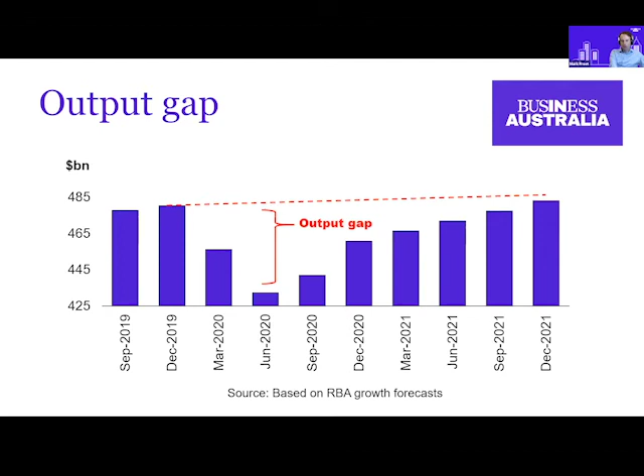Going forward, if you look at this chart, what it's showing is this gap is persistent, and this is a demand story. This isn't the shock of the shutdowns, this is the demand failing to pick up. So this is where organisations like ours are really thinking about what we need in the economy to make sure we can close that gap as quickly as possible.

In terms of the things we think governments need to do is to shore up business confidence and then consumer confidence. Government has an important role to play here insofar as they're essentially the backstop, providing the social safety net for households. We've seen the massive impact that programs like JobKeeper has had to keep businesses afloat and keep them trading and operational.

So in terms of our advocacy priorities and policy priorities, the things we'd like to see from government are those that can allow households and businesses to go out and spend and invest, hire people, even just keep their staff on as they've currently got employed, because they have this sort of effect where it all collapses, it's like a deck of cards. If you remove one piece at the bottom, the whole foundation sort of ends.

We're quite concerned at what's happening in Victoria, not just from a virus outbreak perspective, but for the potential that has and the signals that sends to businesses in the rest of the country. Even businesses in Queensland or Western Australia or New South Wales might say that doesn't affect us directly, but if you're looking at this and the potential for a second wave outbreak, it can have a real chilling effect on your willingness to make crucial investment and hiring decisions.